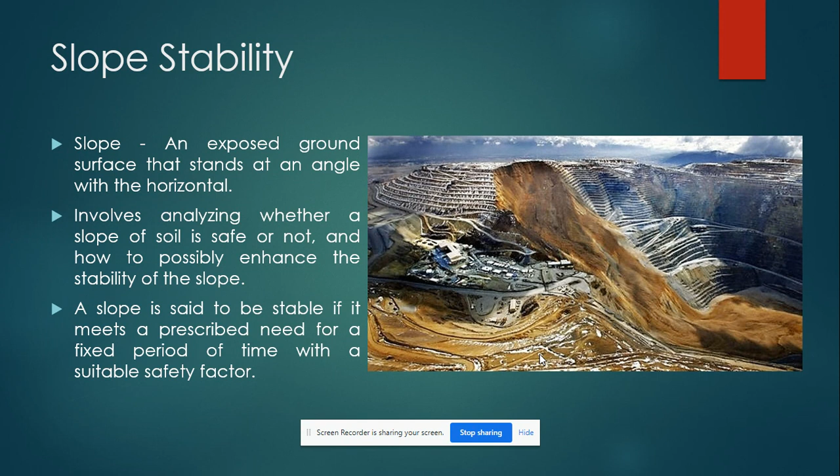So what are the aims of the slope stability analysis? To understand the development and form of natural slopes and processes responsible for different natural features. That's the first one.

The second is to assess the stability of slopes under short term. Usually ang short term is after, during, or just after the construction. And long-term conditions, yun naman yung matagal na time after na mismo ng construction.

To assess the possibility of landslides involving natural or existing engineered slopes. So mamaya pag-usapan natin yung difference ng natural and engineered slope. To analyze landslides and to understand failure mechanisms and the influence of environmental factors to the slopes.

To enable the redesign of failed slope and the planning and design of preventive and remedial measures if necessary. And then lastly, to study the effect of seismic loadings on slopes and embankments.

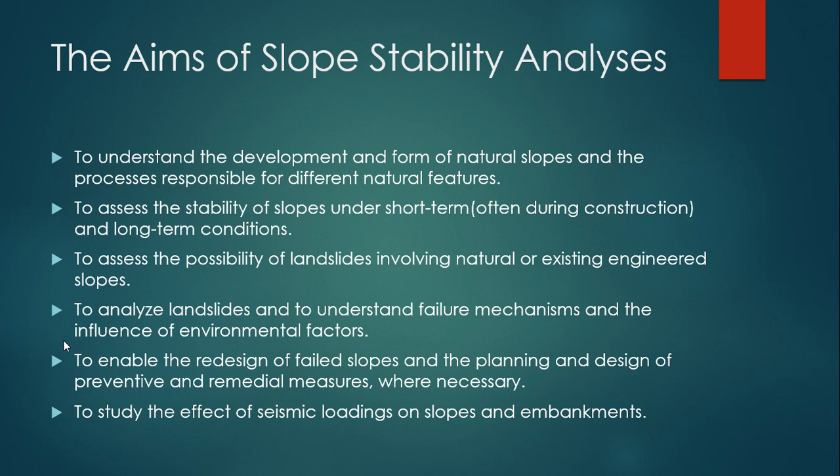So what is the overview? Slope stability analysis is used in a wide variety of geotechnical engineering problems, including but not limited to the following. So the first one would be determination of stable cut and fill slopes, assessment of overall stability of retaining walls, including global and compound stability. Includes permanent systems and temporary shoring systems, if you are to put them.

Assessment of overall stability of shallow and deep foundations for structures located on slopes or over potentially unstable soils, including the determination of lateral forces applied to foundations and walls due to potentially unstable slopes. Stability assessment of landslides. So here we have mechanisms of failure and determination of design properties through back analysis, and design of mitigation techniques to improve stability. And lastly, evaluation of instability due to liquefaction.

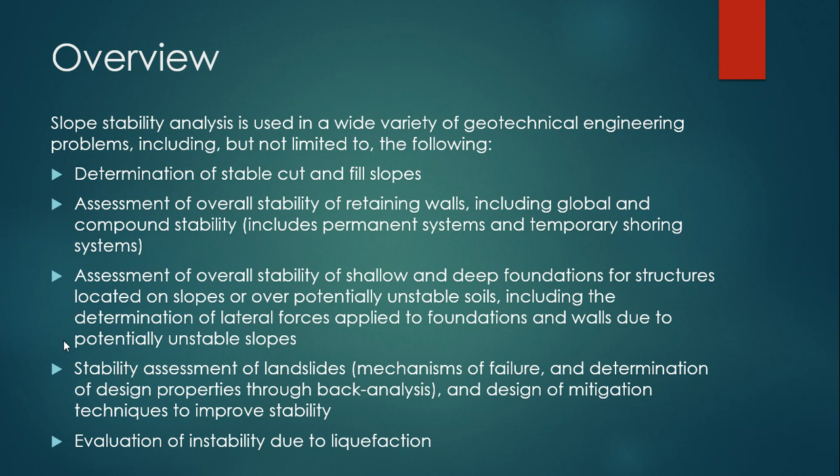So what are the different types of slope based on the method of construction? Dito papasok ang natural slope and man-made or engineered slope. So tingin ko self-explanatory naman to. So natural slopes are those what we see around us, untouched by human beings, while the engineered slope are the ones being computed and made it so by people.

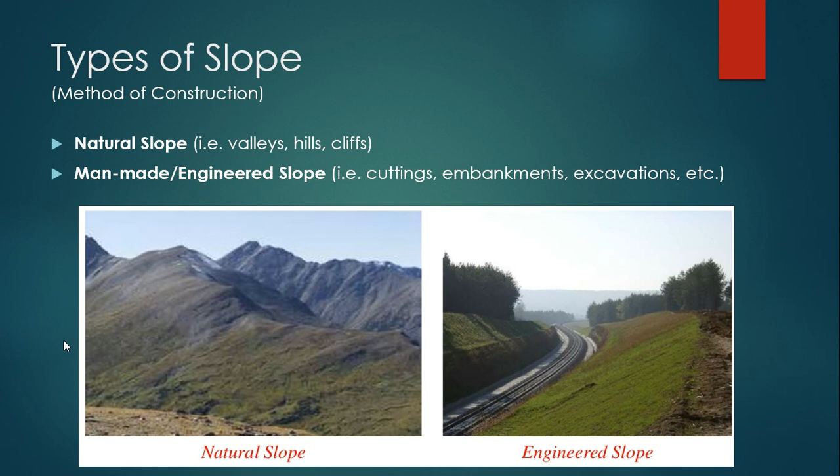How about the type of slope due to extents? So we have infinite slope and finite slope. Self-explanatory to, through which infinite slopes are those larger amounts of distances of slope, while finite slope is near amounts, tipong kaya lang i-comprehend. So usually, finite slopes are those on slopes and embankments and earth dams.

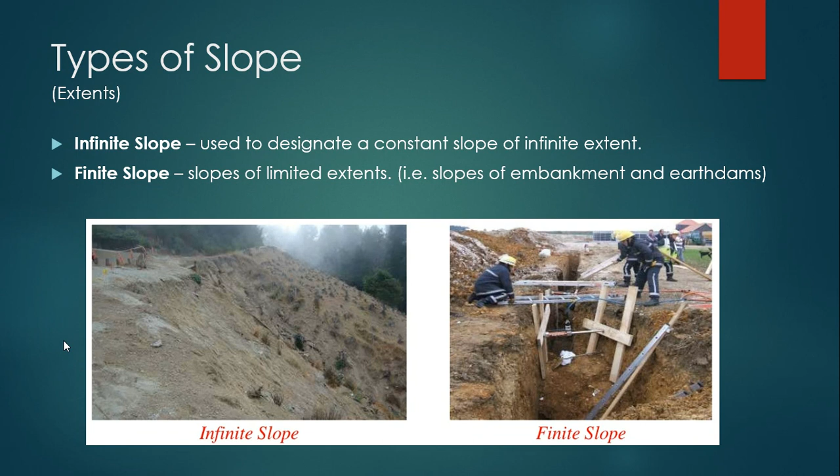So what are the different classifications of slope failures? So what can happen that would be detrimental to human beings when it comes to slope failures?

First one would be the fall. This is the detachment of soil and or rock fragments that fall down on a certain slope due to the gravity of the earth and of course instability of our rocks and or soils.

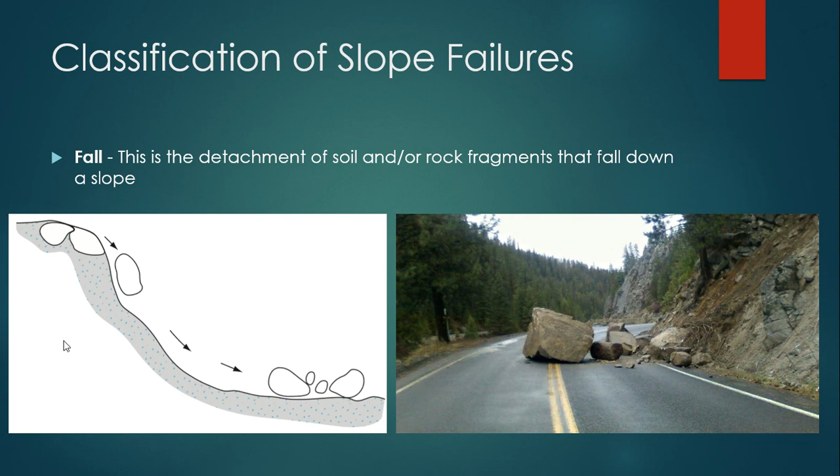We have the second one, topple, a forward rotation of soil and or rock mass about an axis below the center of gravity of mass being displaced. As you can see in front of you, since there are no soils that would support the downward portion of this, then possibility is due to moment, this will topple along, just like what you see in the picture.

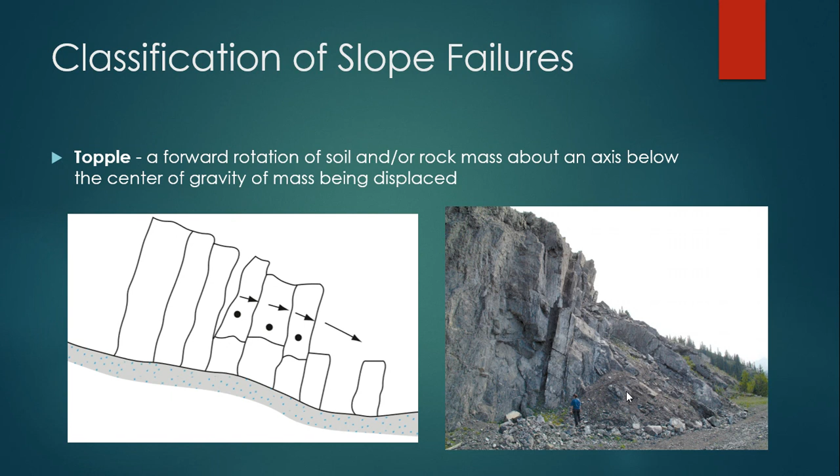The third one, and the most common, that would be the slide. That would be the downward movement of soil mass on a certain surface. And this is most likely the ones that we will try to analyze as we go along our topic.

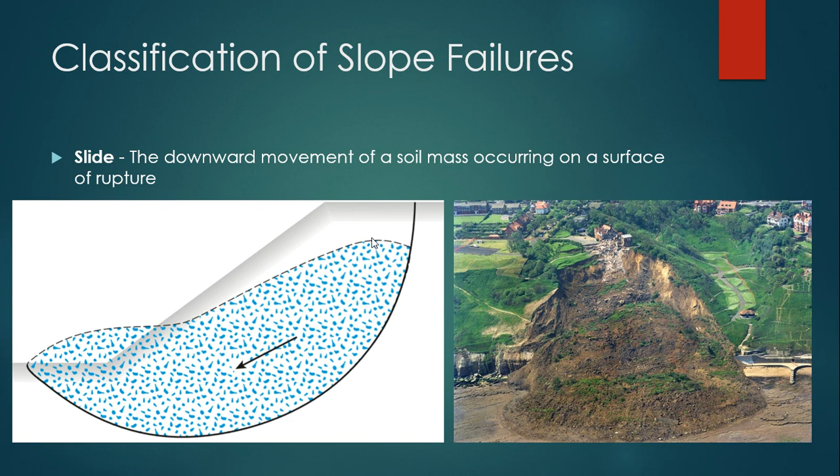Next is spread, the fourth one. A form of slide by translation. It occurs by sudden movement of water-bearing seams of sands or silts overlain by clays or loaded by fills, just like what you see in front of you.

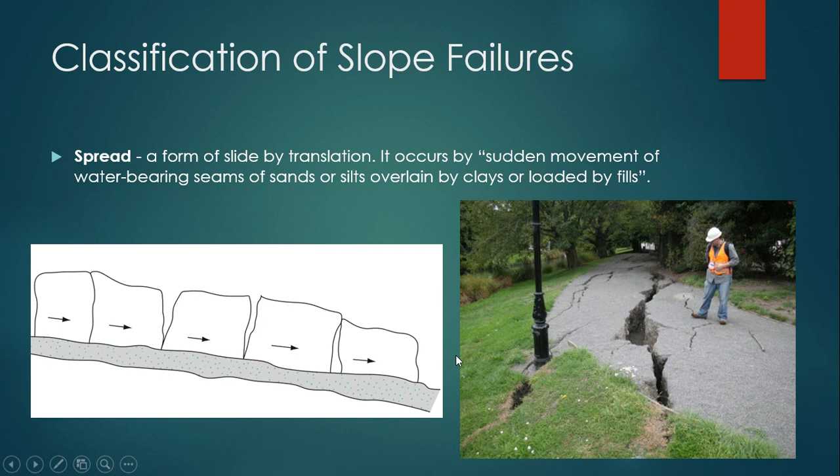And lastly, flow. This is a downward movement of soil mass similar to viscous fluid, which means that it's mostly moisturized type of soil.

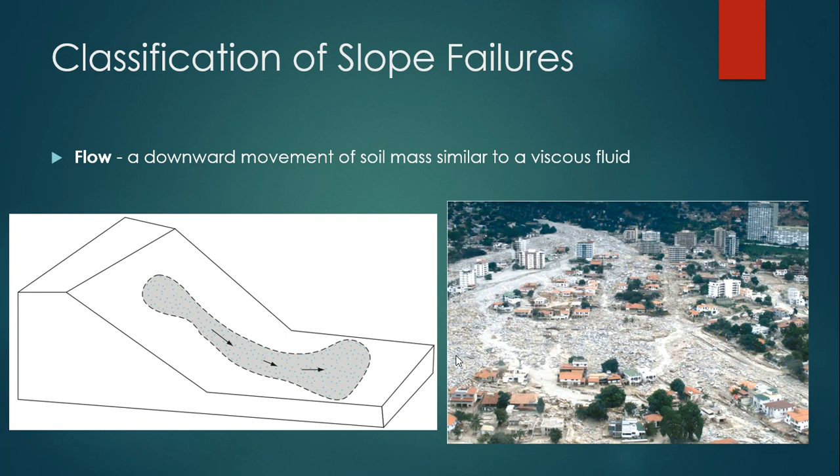So what are the different causes of failure of slopes? First, gravitational force. Second, force due to seepage water. Third, erosion of surface of slopes due to flowing water. Fourth, the sudden lowering of water adjacent to a slope. And lastly, forces due to earthquake.

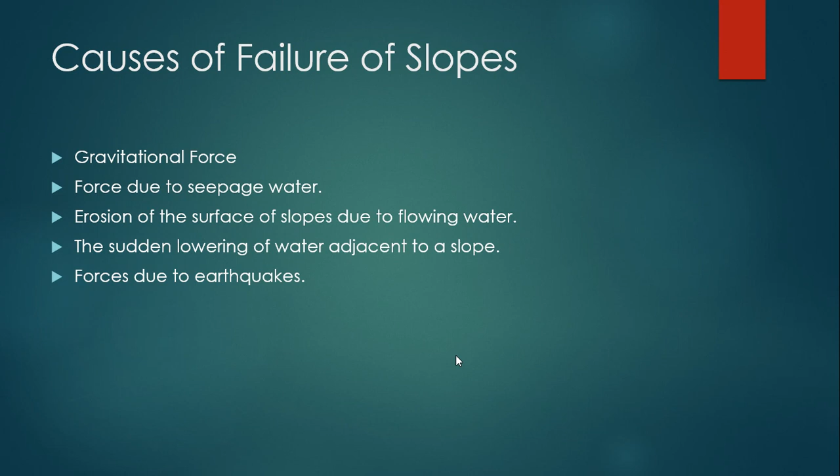So, let's talk about the factor of safety, which represents the stability of slope. Means that the higher the number of the factor of safety is, the more stable the slope is. And it would be usable for people or safe for the people to live with or around it.

So the factor of safety with respect to strength is the ratio between the average shear strength of the soil and the average shear stress developed along the potential failure surface. So to get the factor of safety, we need to get the ratio between the strength of the soil, or let's just say the capacity strength of the soil, with respect to the applied stress in terms of shear on that particular soil.

The higher the number of factor of safety is, the stronger it is, which only means that the capacity should be larger compared to the applied stress. And in this case, the shear strength of the soil is the cohesion of the soil. This is the actual cohesion of the soil property plus sigma times tangent of the angle of internal friction of the soil.

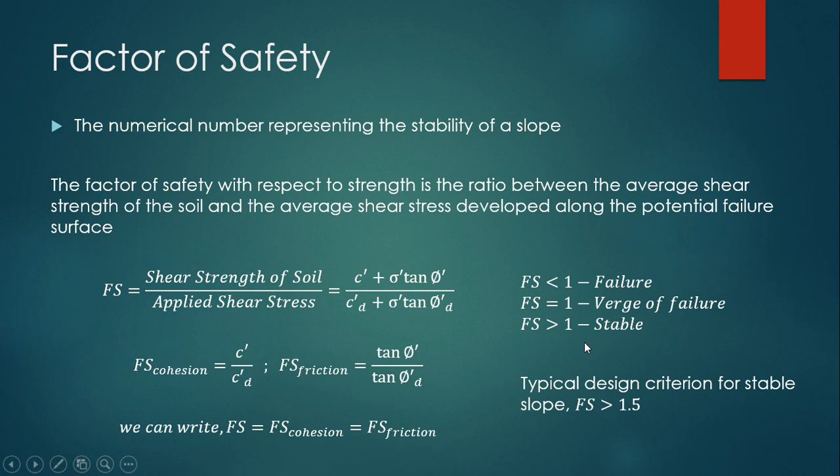So first among the two, we will try to analyze the stability of an infinite slope. So again, the analysis of this would be that the factor of safety is the capacity of the soil over the applied stress or shear stress on the soil.

So assuming that the pore water is not present or zero, we'll evaluate the factor of safety against sliding here. So the shear strength of soil may be given as tau F, or the shear strength of the soil, will be equal to the cohesion of the soil plus sigma prime tangent phi prime.

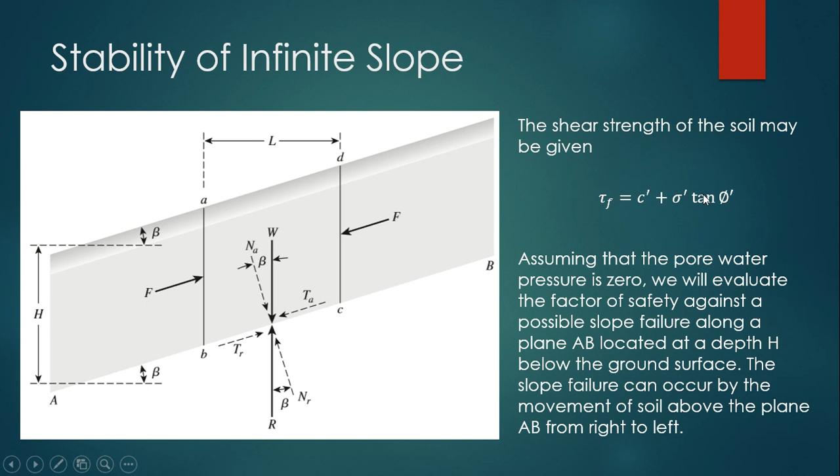So let us consider a slope element A, B, C, D, which has a unit length perpendicular to the plane of the section as shown. The forces F acting here are equal and opposite, so we can ignore this value.

Now, going for the weight of the soil, we can compute that using our unit weight multiplied by the volume of the soil.

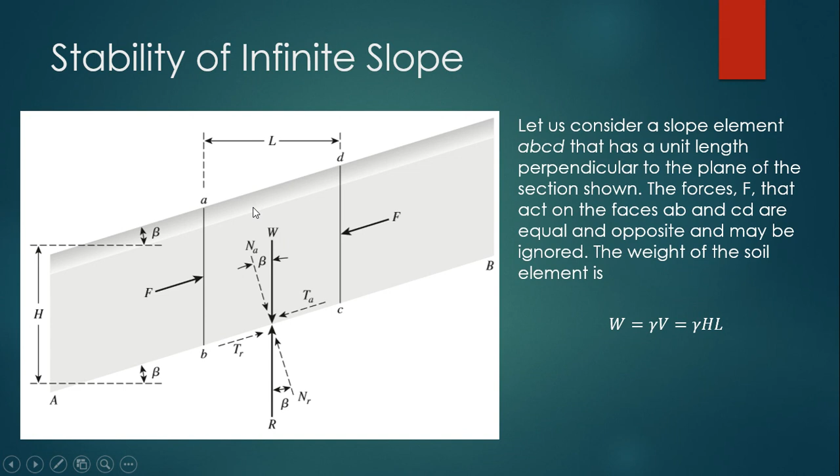After that, we can compute the normal stress at the base. So the normal stress sigma prime will be equal to NA over the area of the base.

NA over the area of the base is the same as gamma times H times L cosine beta, due to the angle of the soil. The area of the base is used as L over cosine beta. Take note, the area is considering a 1 meter strip of width. It's not being placed here, but it's being used.

So now, the normal stress at the base is equal to gamma times H times cosine beta squared. That is for the normal stress.

Now computing the shear stress at the base. So the shear stress, we need the shear force. Using this TA, shear force, divided by the area of the base, it should look like this. For the normal stress, we use cosine of beta. For the shear stress, we will use the other one.

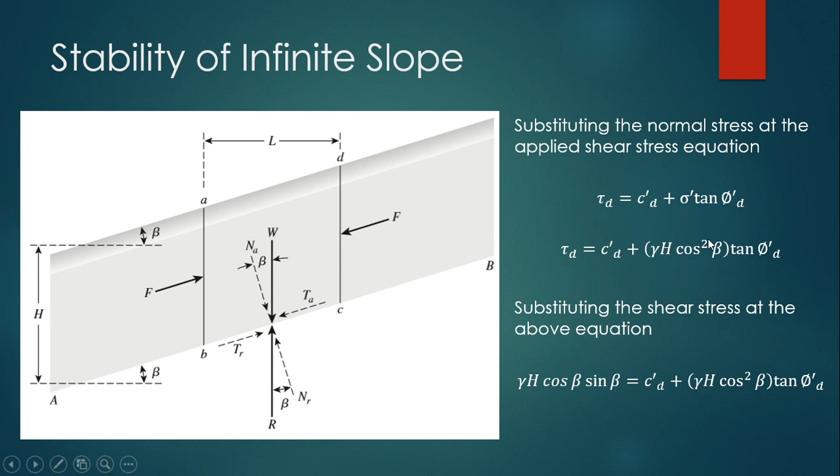Substituting the normal stress on the equation for the applied shear stress, it would look like this. Then substituting the shear stress at the equation here, it would look like this. Since we're discussing the applied case, we put it in the applied equation as well.

Adjusting the equation, we can now get this. We can remember that tangent phi prime, which is the applied one, will be equal to the actual tangent phi prime over the factor of safety. And of course, the applied cohesion is also equal to the true cohesion of the soil over the factor of safety. Substituting this with the values above, you can now get this equation.

Then, simplifying it more, we can now get the equation of the infinite slope. This is only true for non-seepage and non-granular soil. So this only applies for those soils which has cohesion, or cohesive ones.

Because granular soils are those cohesionless soils, which means that the cohesion is zero. So what would happen if we are to use this formula for those soils that are granular in nature? If the cohesion is zero, then the factor of safety is more reliant on the friction factor and the angle of the soil. It's just that the angle of the soil should be lesser than phi prime.

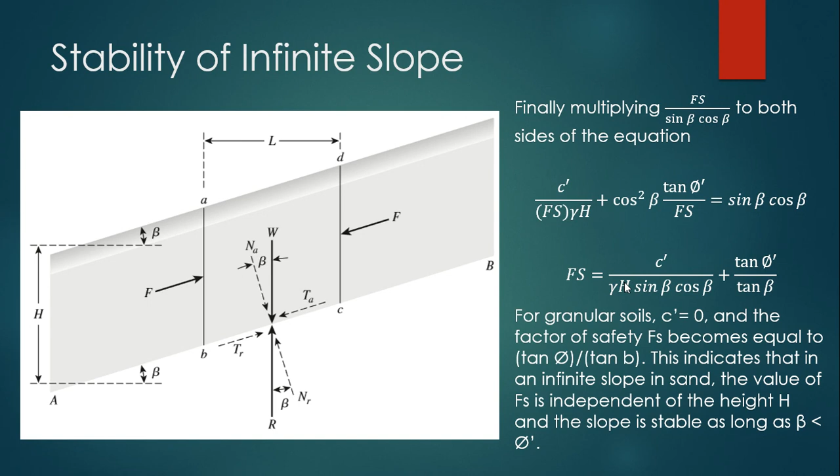The gamma below would be changed to gamma saturated, and on this right side gamma buoyant will be added. We could remember that gamma buoyant is the same as gamma saturated minus the gamma of water. And this gamma sat is added here below.

So that is with the steady seepage on the soil, which means that the water table is not receding or getting above.

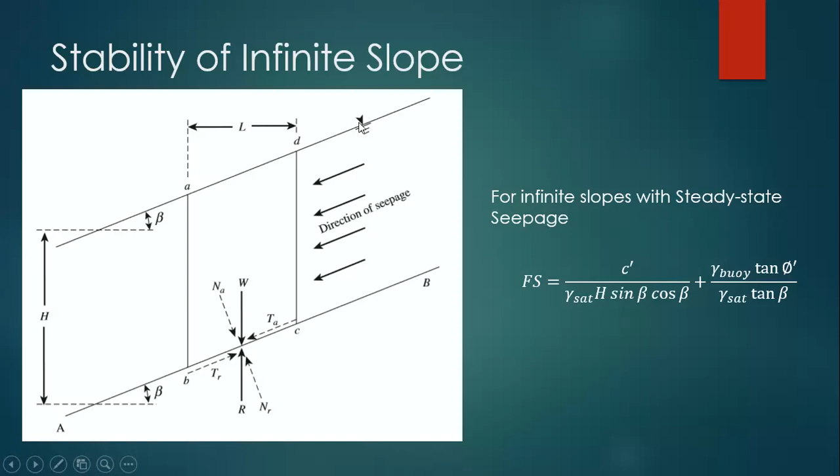So as an example: for the infinite slope shown, considering no seepage is present, determine first the factor of safety against sliding along the soil-rock interface, and second, the height h that will provide a factor of safety of 2 against the soil and the rock. Here we have the properties of soil: gamma as 15.72 kilonewtons per cubic meter, the cohesion of the soil is 9.58 kilopascals, and the angle of internal friction of the soil is 15 degrees.

This is considering no seepage. The height of the soil is 2.44 meters, and below the soil is a rock surface.

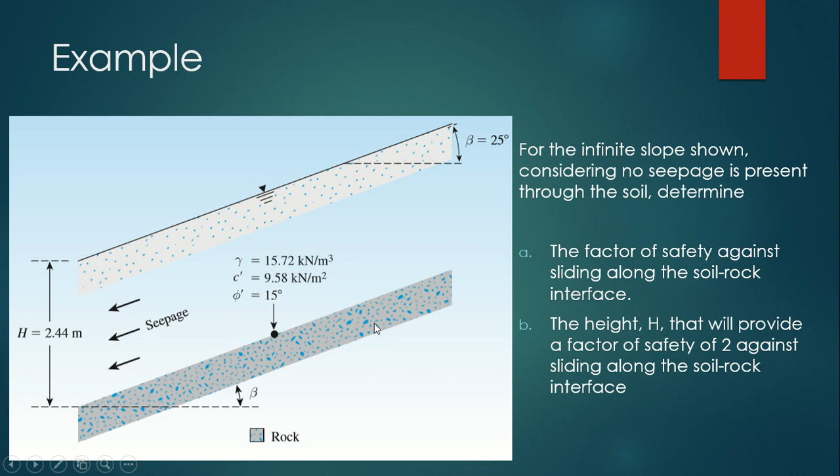For the solution, for the factor of safety against sliding, you can just put all the given values on the equation provided. The cohesion is present, gamma is given, the height of the soil is given, the angle of the soil is provided, the angle of internal friction is provided. You can just put the values there, and you can now get the factor of safety as 1.23. We can still say that the soil-rock interface is safe.

Then for the second one, the height h that will provide the factor of safety of 2. So instead of the factor of safety missing, it would be the height which is missing. Substituting 2 into the factor of safety equation and making our height the variable, using this equation and calculator shift solve, we can now get the height as 1.12 meters. So at the height of 1.12, the factor of safety will be 2.

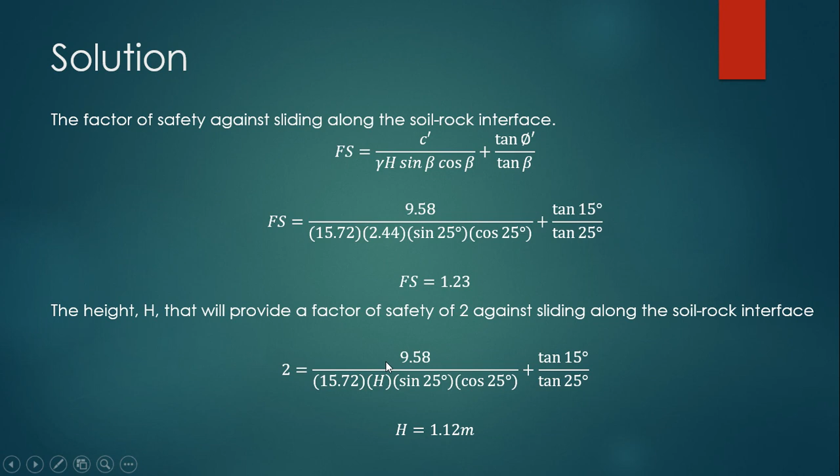So moving on to the next topic. A while ago, we talked about infinite slope. Now let's talk about the finite one. How can we determine whether a slope should be solved as infinite or finite?

If you get the critical height and it is the same as or near the actual height of the slope, then you use finite slope analysis. If the critical height is too small compared to the actual height of the slope, then you can use infinite slope analysis.

So the method will be reliant on the critical height. For simplicity in this scenario, let's analyze the stability of finite slope using homogeneous soil, which means the soil is the same all throughout.

Evidences show that slope failures usually occur on a curved surface. In actual cases, it's rarely a straight, linear failure that slides down. Most of the time, the actual surface is curved. So that's what we'll discuss.

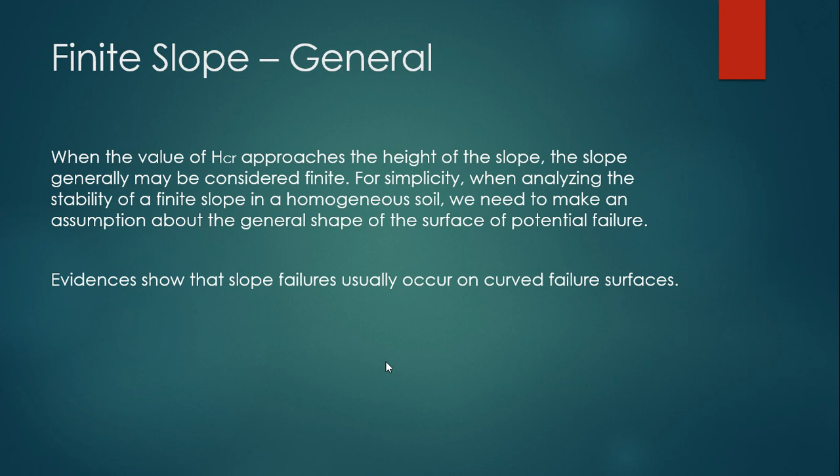For finite slope, how do we solve it? Before, in undergraduate studies, we learned about Culmann's method, through which we assume that the failure of the slope occurs on a plane, linear surface. The shearing stress tends to slip the soil above to go downward. So here we analyze the shear stress acting on the soil above and below.

But using the formula, we can come up with this. I haven't shown you the equation or the derivation for this one, but it's almost similar to the one we had earlier for infinite slope.

In finite slope, we usually encounter critical height. If we're using critical height here as the basis for getting our height, then the value of cohesion should be the true value of cohesion, and the angle of internal friction should be whatever property is given for the soil.

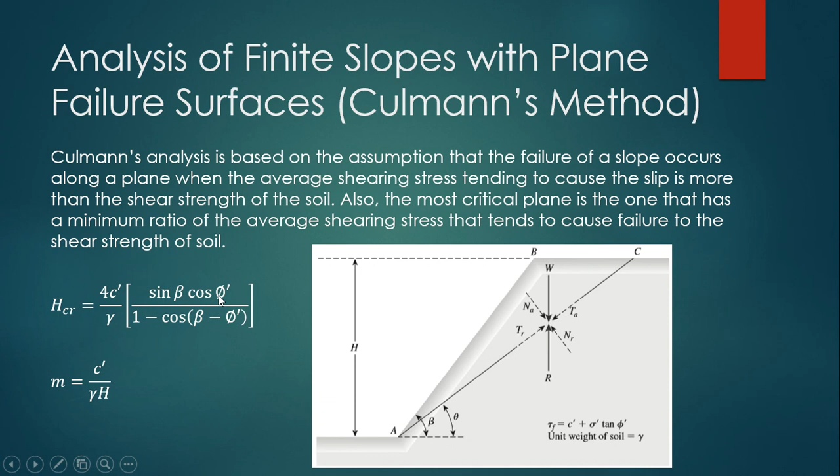That is for finite slope, Culmann's method for plane failure.